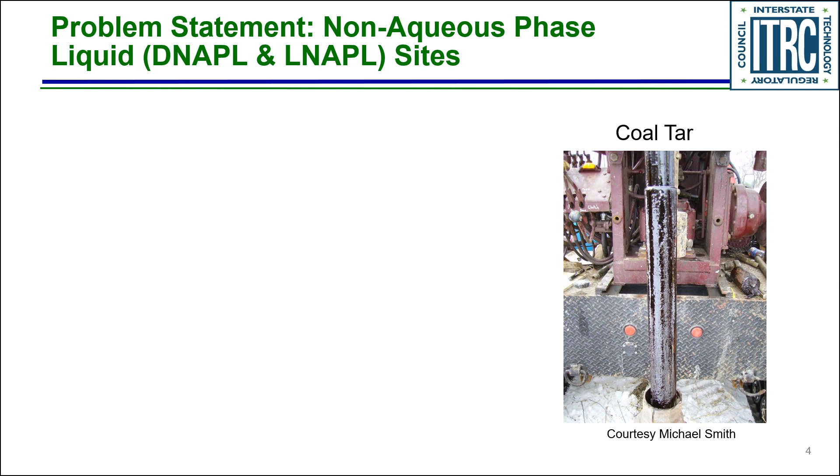So we're going to talk about the problem statement. DNAPL, NAPL in general, is very difficult to clean. It's very challenging to deal with, and most likely provide difficulty, and we don't have enough technology that can deal with that.

But we do have ways to characterize the site, and we're going to talk about that during this training.

One of the problems with the DNAPL site or NAPL site in general is it's very hard to achieve the cleanup goal. We cannot get to MCL easily. We can spend a lot of money, but we cannot eliminate the risk. The risk can stay at the end of the cleanup.

One of the common challenges with the DNAPL site is we don't understand them as well. It's not a complete understanding of the NAPL site because we don't do good characterization - a complex matrix, either man-made or natural. And we set up an unrealistic goal. I can say, oh, I'm going to clean that DNAPL to MCL, and it's very difficult to achieve that. And quite often we select a remedy that does not work for the site.

So what's the objective of our training today? We're going to be talking about how to understand the site conceptual model, typical for DNAPL dissolved phase plume. And we're going to also talk about fate and transport of NAPL in the subsurface.

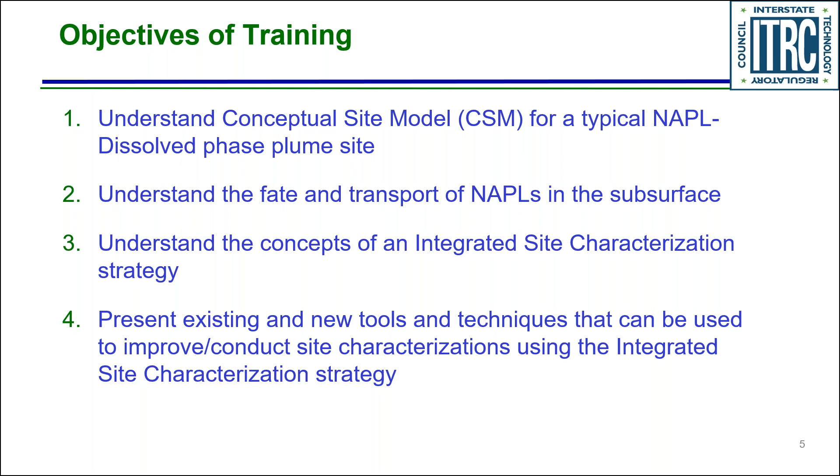So NAPL, L-NAPL, usually a gasoline product in general. Here's some examples of it: benzene, toluene, xylene - all benzene products are considered L-NAPL because they float over water, having a lower specific gravity than water.

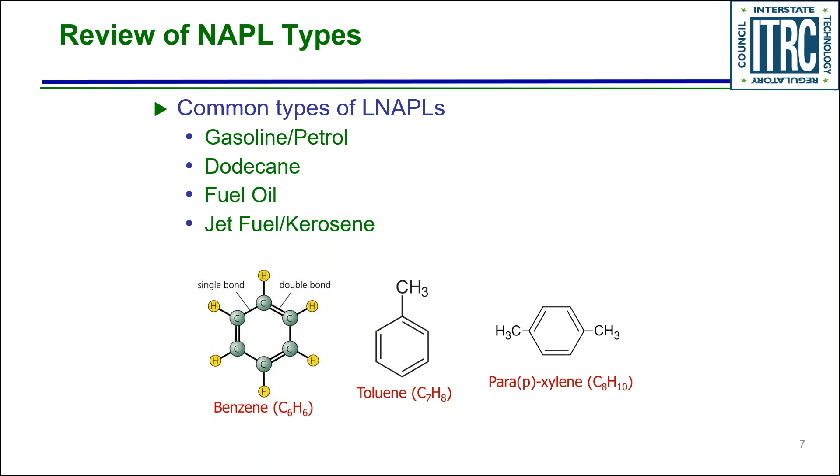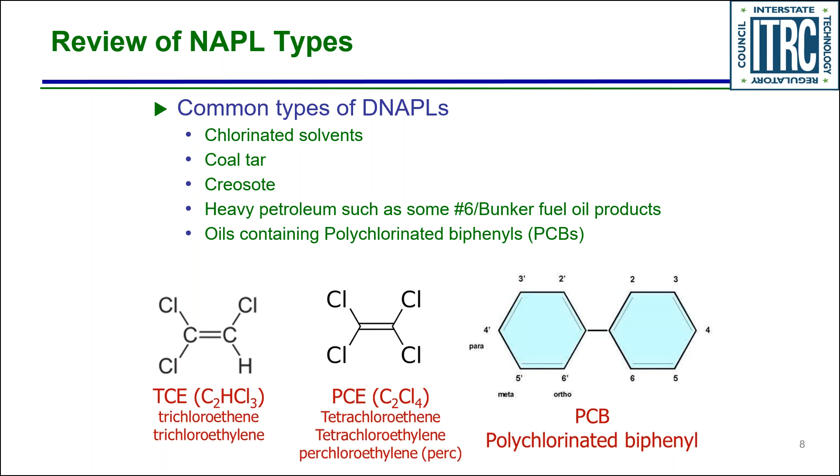And DNAPL - here's an example of DNAPL, TCE, PCE - usually heavier than water and sinks, the sinker. Here's an example, the tube given to us by Dr. Kurt Pennell, and you can see PCE sinks down to the bottom of the tube, and N-hexane floats because it's lighter than water.

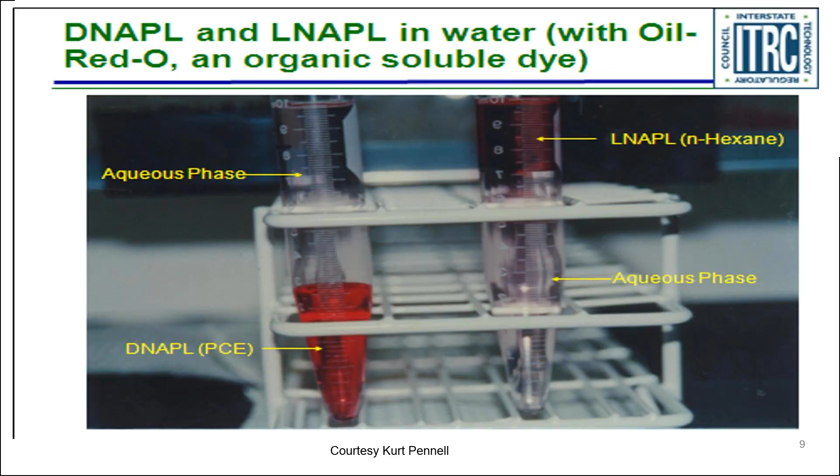We're going to talk about some of the NAPL properties, some of the chemical and physical properties of NAPL. Usually when we discuss those properties we give you equations and examples of how to solve them, but because of the short time frame for this course, we're going to cover maybe one or so, but we're not going to go over all the detail of all these properties.

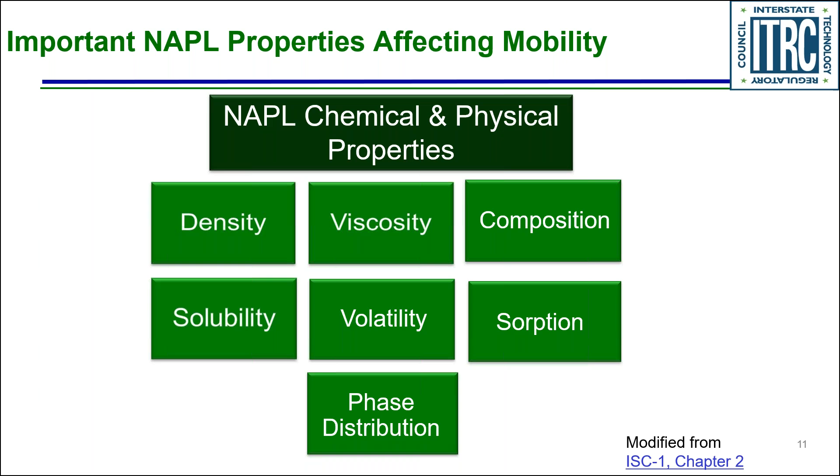So those properties are density, viscosity, composition, solubility, volatility, sorption, and phase distribution. And we're going to talk about those in semi-detail.

So density - density is mass per unit volume, usually expressed in milligrams per liter, or it's mass per volume, or it can be expressed in terms of specific gravity. Specific gravity is the density of a substance or chemical divided by the density of water, and it's a unitless value.

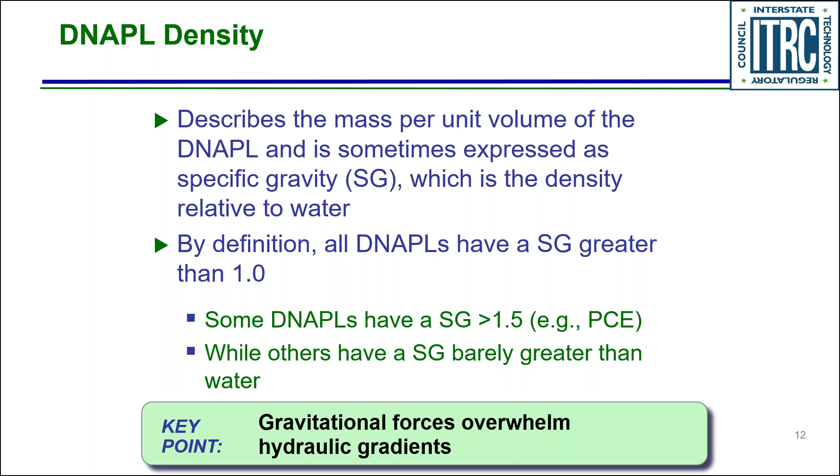DNAPL usually has a specific gravity more than 1, which is heavier than water and usually sinks, as I said earlier, and LNAPL has a specific gravity lower than water and floats on top.

One of the things we need to understand is that the property of the pure NAPL that you purchase from the manufacturer is totally different from the properties of the NAPL you have at your site. The reason for that: the pure product has nothing mixed with it. The NAPL at your site is usually used already - solvent mixed with grease, with oil.

And therefore the property of that NAPL is not the same as the one you purchase from the manufacturer. So you have to make sure you understand that when you go to the textbooks or books and look for solubility of some compound, that can change if you have it at your site. It's not going to be the same.

Also, mixture - NAPL can exist in mixture, and DNAPL can partition into LNAPL. So in some cases, you cannot see the DNAPL or LNAPL in a pure phase at your site. So you need to get a site-specific sample and check site-specific properties in order for you to know the property of the NAPL at your site.

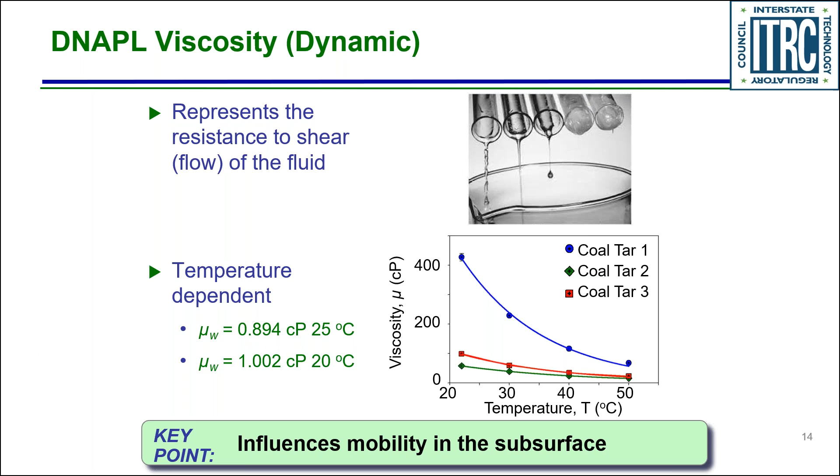This slide here was put here by Chuck Newell, and I'm going to have him describe it and tell us what it's all about. Chuck? Sure, Naji.

So this is just a little anecdote, a very famous experiment in the viscosity world, at the University of Queensland in Australia. In 1927 they set up this experiment. You can see it right there, and there's even a webcam of it. They cut the stem in 1938. This is a very viscous solution, a pitch that comes from trees, and it doesn't flow very much. Now water has a viscosity of about 1 centipoise.

In 1947 the first drop fell, then 1954 was the second one. This is an exciting experiment - there's a lot going on here. You can see it's taking more and more time as you go down. The last drop, the 8th one, fell in 2014.

And Naji, do you think it's okay if we assign some homework to everybody out there attending the webinar? Yeah. So if we heat this, we're thinking it's going to flow faster.

If we heat it, it would, but that's not the homework. The homework is everybody's got to go watch the 9th drop fall - that might be sometime around 2020 or 2030. So we'd like everyone to do that. The viscosity is something like 230 billion centipoise, so it's a very slow drop. That's a viscosity example.

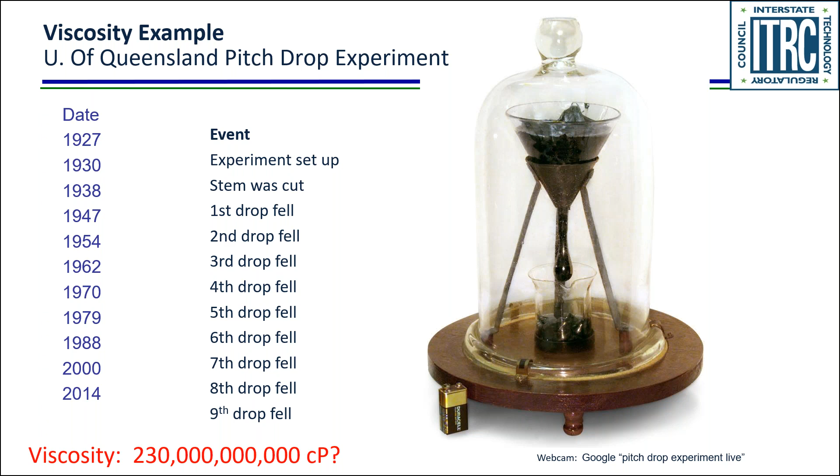Thank you, Chuck. So the next property is solubility. Solubility is basically the maximum amount of pure compound that can be dissolved in water at equilibrium. So we have NAPL here, the red figure, and above the NAPL is water - the maximum amount of NAPL that can dissolve in the water above it is the solubility of that NAPL.

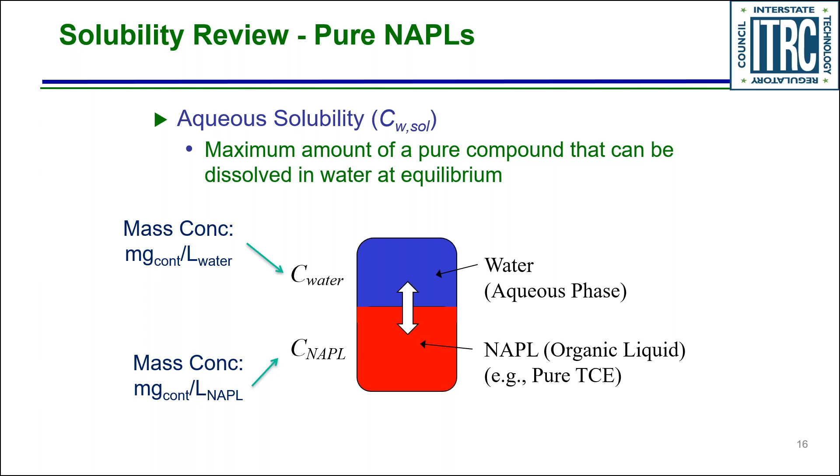Okay, so we're going to have a little exercise here. Usually I have much more math than this, but this is just one example I left in the slide to give you an idea. If we have a 55-gallon drum of TCE, how much water does that 55-gallon drum have the potential to contaminate to the level of the MCL, which is 5 micrograms per liter? So we're going to go through this exercise.

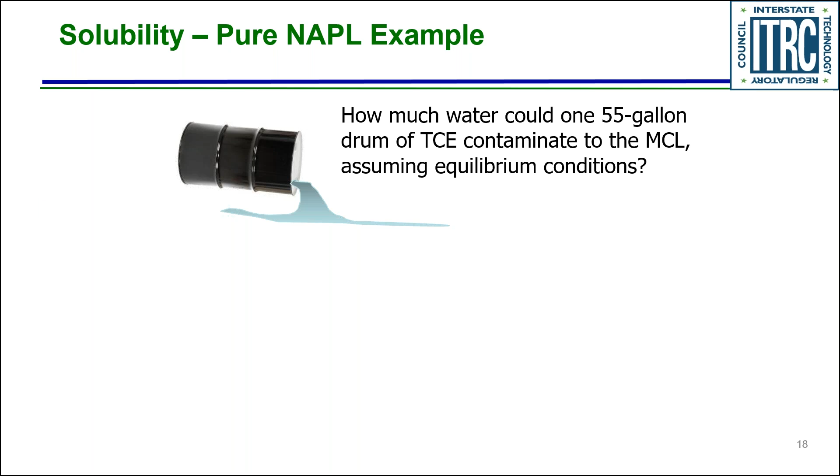55 gallons - we dump them in a big lake with an unlimited amount of water. How many gallons of water will be contaminated above MCL? So here's the equation: 55 gallons, change that to liters and then to milliliters, multiply that by the specific gravity of TCE, which gives us how many grams of TCE. Then convert grams to milligrams, divide that by the MCL of 0.005 milligram, change it back to gallons, and we get 1.61 times 10 to the 10 gallons, which is 16 billion gallons.

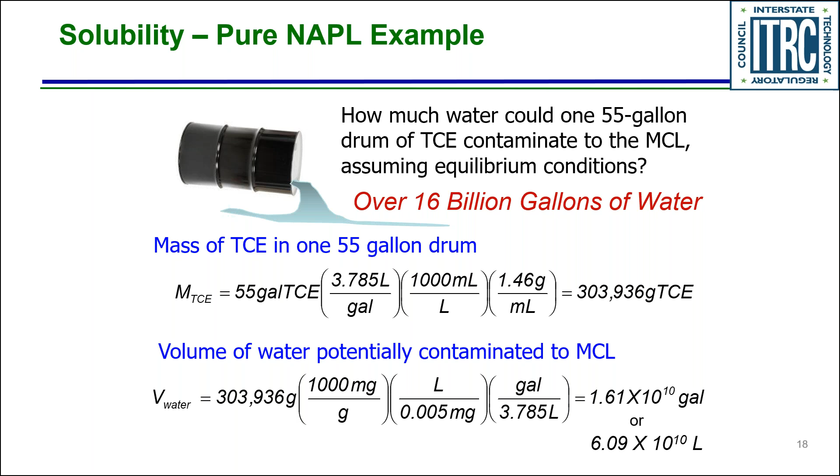The next item here is, or property is, solubility. Solubility for a pure product is different than solubility of a mixture. So we use Raoult's law to figure this one out. If you have a mixture in the subsurface, like TCE, PCE, and some other compound, to calculate the solubility of your mixture for any particular compound, you multiply the mole fraction of that compound by its pure solubility to come up with the solubility of that compound within the mixture.

Is that clear? I assume it is.

The next property is volatility. Volatility is very important in terms of vapor intrusion. The reason we need to know about volatility is because of the danger of vapor intrusion in homes and businesses.

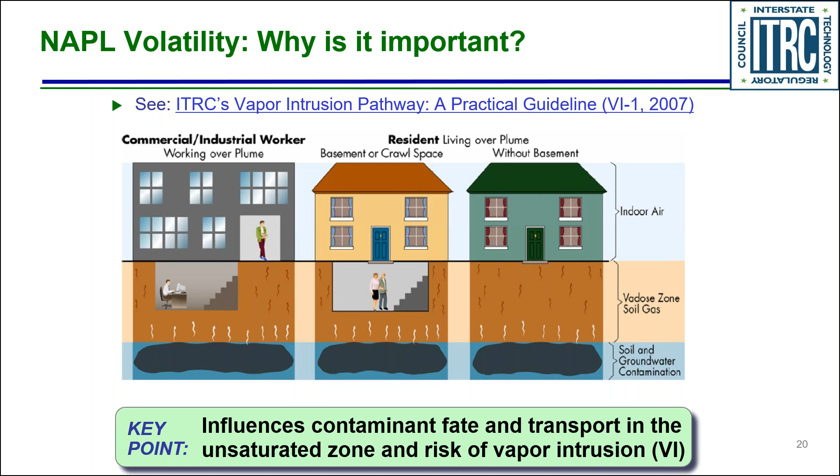So volatility, when it comes to a pure NAPL, as you see here in that figure, you have NAPL and you have vapor above the NAPL. Vapor pressure is the maximum amount of pure compound that can exist in the gas phase. To calculate that, we use the ideal gas law. Here's one form of it, here's another form of the ideal gas law, and a third one that can give you the concentration of gas above the NAPL, shown in red.

Again, I have a mathematical example to try to solve it, but we don't have time for that in this training.

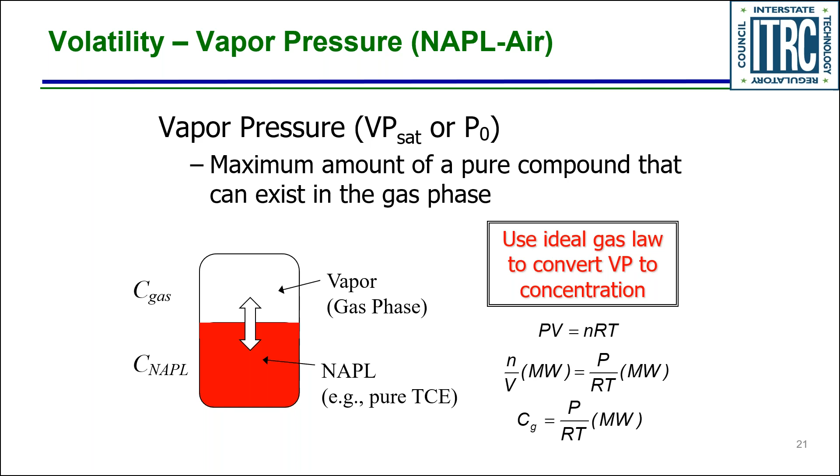Now, sorption. Sorption is dominated by soil organics or high surface area minerals. So if we're talking about absorption, it's basically the soil organic, and if we're talking about adsorption, that will be dominated by high surface area mineral.

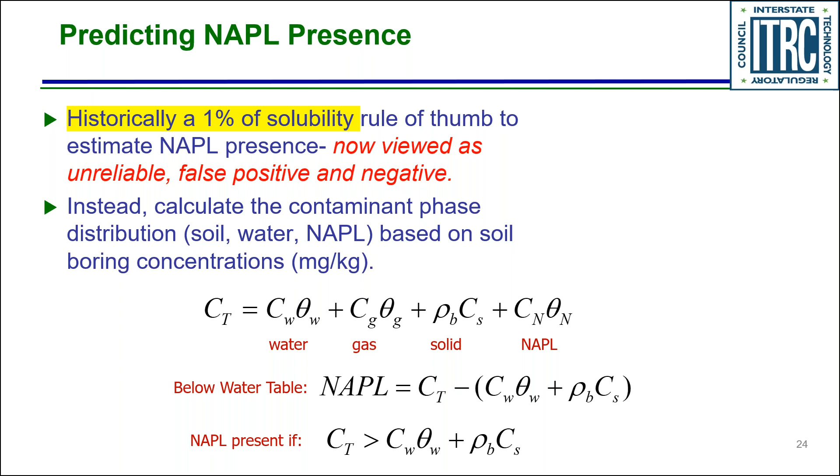Some other properties relate to interaction with the subsurface media that affect mobility, and those are 5 properties: interfacial tension, wettability, capillary pressure, saturation, and residual saturation.

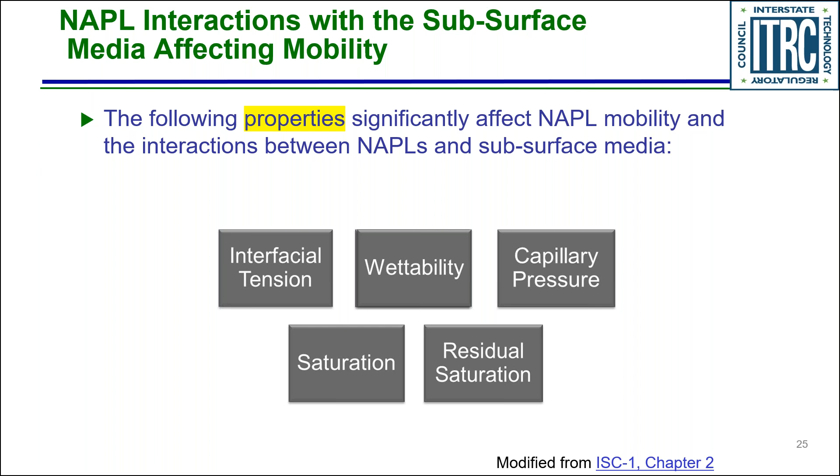I don't think we have time to go over all of those, but I'm going to talk a little bit about saturation and residual saturation because those are the two most applicable to the mobility of the DNAPL in the subsurface. The other ones are important as well, but we only have time for these two.

So what is saturation? Saturation is what proportion of the subsurface pore space within a certain volume you select is occupied by fluid, and that fluid could be DNAPL, air, or water. It's a number between 0 and 1.

The residual saturation is the same volume of soil, but what fraction of that volume has been separated from the original DNAPL and become disconnected from the DNAPL. I'm going to describe that in the next slide.

We're going to talk a little bit about the life cycle of DNAPL. So we're going to start with the classic model. You have a source zone, you have a spill. You can see here where it says active source, that something is spilled there.

The DNAPL is going to go down, migrate down to the subsurface, go through the soil on top of the water, and then continue. If it hits a low permeability zone, it will go around it and keep going down until it gets to the area where it's not going to move anymore.

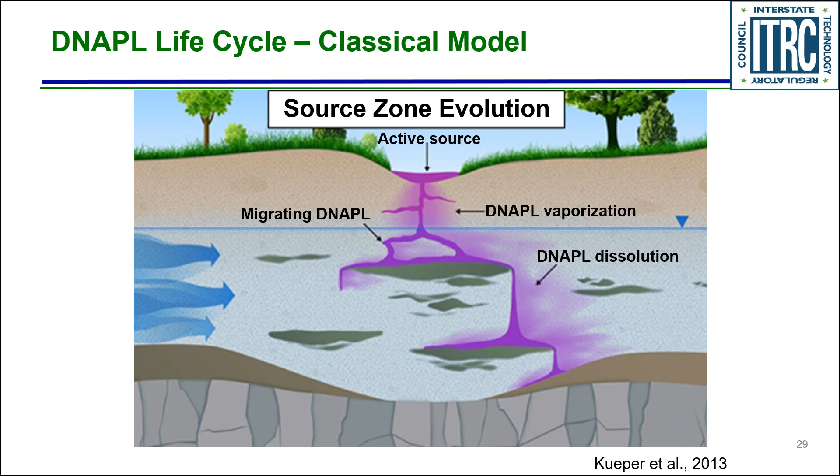So here's another kind of picture of it. We see in this picture some of the DNAPL evaporizing as a vapor, coming out as a vapor. Some is going to dissolve in the plume and move with the plume.

Some will settle down at the bottom of the aquifer, and if there's enough head pressure, the DNAPL will displace water in the pore space and settle there. So basically, you have DNAPL going as vapor, some dissolving, and some settling in the pore space.

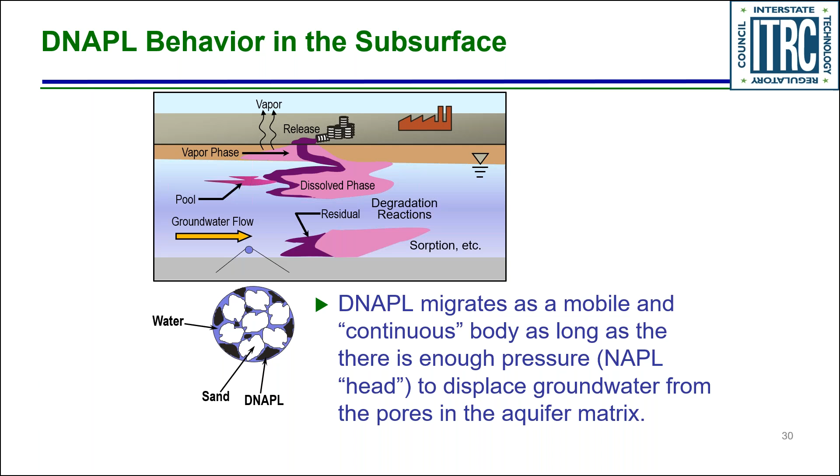One of the issues here is that the subsurface is very heterogeneous. The pore structure in the subsurface and the capillary pressure can change from area to area within a very short space, within inches - you can have a different pore structure and capillary property.

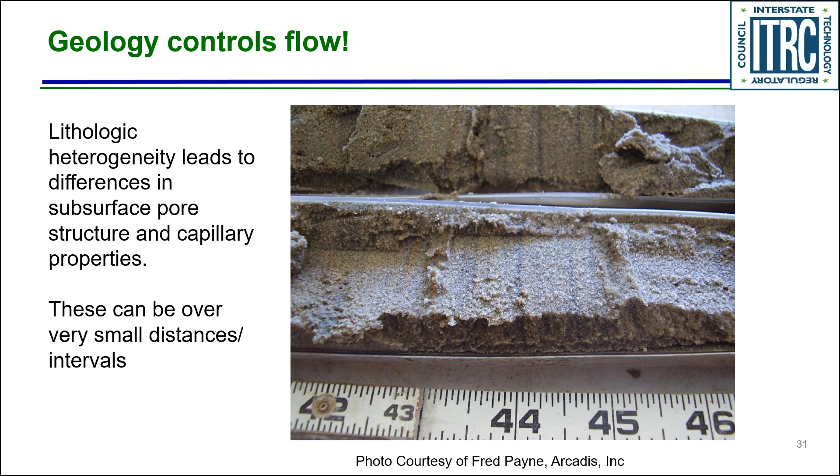Therefore, you need to understand that the subsurface is heterogeneous and the flow is not going to be the same from one zone to another because the pore structure can vary from area to area in a very short distance.

Again, secondary source within the groundwater plume. We always look for DNAPL, we always look for the source, we always look to see where the DNAPL got spilled, where it is - we cannot find it. Quite often we cannot find the DNAPL because, especially in the late phase, the DNAPL has already moved on.

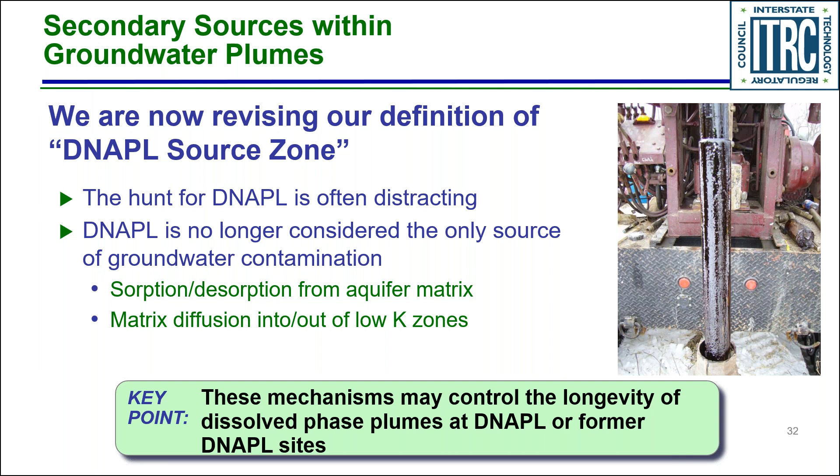What we see is what's sorbed in the aquifer matrix or back diffused from the low permeability zone. So after the DNAPL moved from the source area, you still see high concentration of NAPL in the plume, and you always wonder, where is the DNAPL? It's not there anymore, but the back diffusion process can introduce more contamination to the aquifer.

So here is a video, and I'm going to have Chuck talk about that video quickly. Chuck, take it over. Okay, I think maybe it's on the next slide. Is that right, Naji?

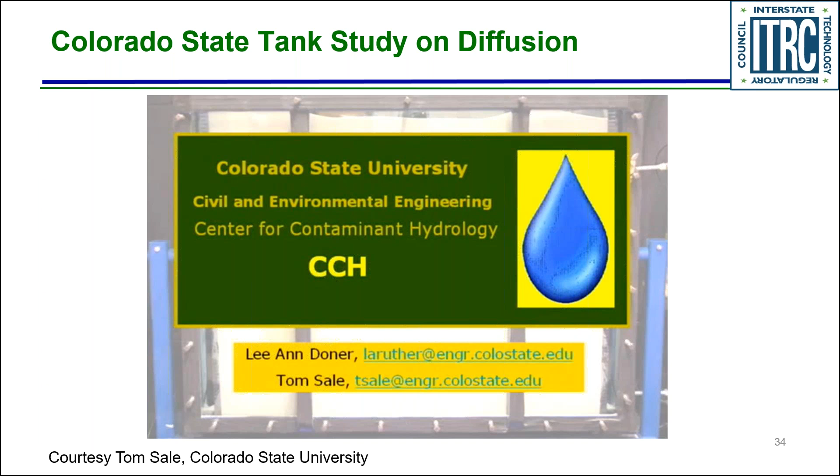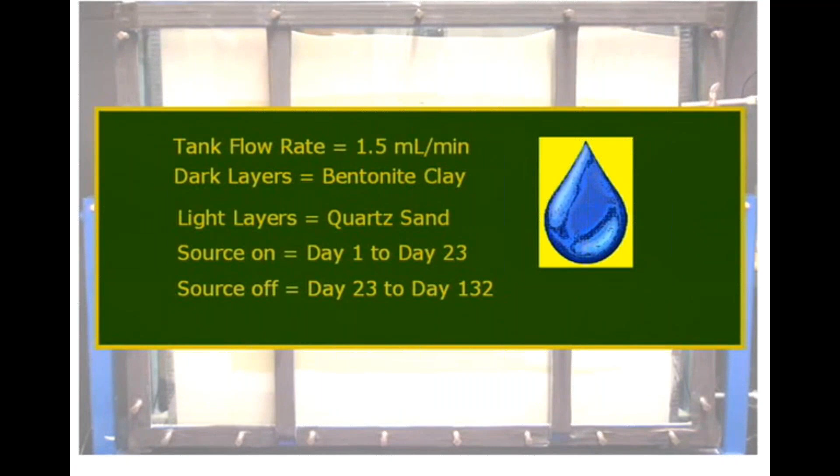Here we go. Okay, so this was developed by Lee Ann, a grad student of Dr. Tom Sale of Colorado State. Here's this research tank. It's filled with sand, but more importantly, 4 of these clay lenses, A, B, C, and D. Lee Ann sets this up, and then they start and set this green dye moving from left to right, and there it is.

So that's advection, that's just groundwater flow, and the counter shows 6 days, 7 days. This is just the way a plume works. It's coming from a source on the left and flowing, and that's your plume. But then you start looking carefully, particularly at that second from the top clay unit. You can see that boundary is getting green.

Then at day 23 they stop that source, and the sand cleans up really, really quickly, just as you'd expect. And that's what a computer model will tell you: 2 or 3 flushes and that sand is clean.

But here we are on day 36, 14 days after they stopped that source, and they're still green in this picture. Where's it coming from? Well, it's coming from this green dye that diffused into these clays, and now that the sand has cleaned up, it's diffusing back out.

And so it's day 55, and Lee Ann comes in and says, Dr. Sale, can I stop? No, keep going. And she's taking these pictures every day. The deal is they run this thing—right now we're at 68 days—for, I think, 132 days, and there's still this material in there.

So just really—Tom Sale says this is perhaps the best demonstration of matrix diffusion, better than any of the great papers he wrote, but this is how we explain it. So that's what I've got, Naji. Let's move on. Thank you.

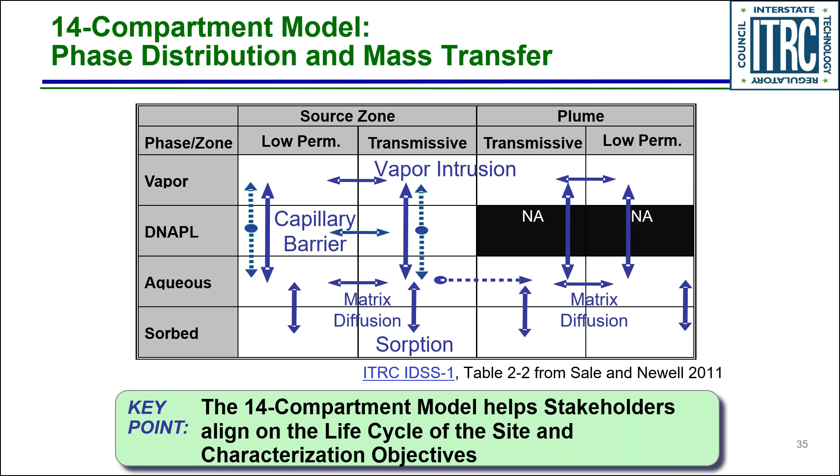So I'll give you an idea: if you're losing mass, you could have lost mass to vapor, lost mass to aqueous, or lost mass because it was sorbed in the soil.

Okay, so continuing with the life cycle: early stage, we have that traditional or classical spill. The DNAPL goes down, and the 14 compartment model is shown again below. You can see at the early stage, as the NAPL goes down into the low permeability zone, there is very low mass in it, but there's a lot of mass, or a moderate amount, in the transmissive zone and in the plume.

The low K zone still does not have as much mass in it yet, because it has not gotten there yet.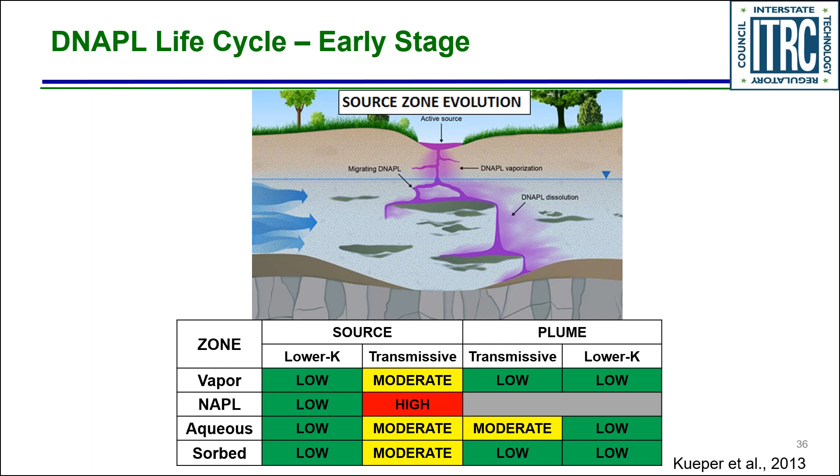But the aqueous phase has a moderate amount of mass. If you go to the middle stage, where the DNAPL now has had enough time to occupy all the stages, it's DNAPL everywhere, okay? So in the middle stage, you see a moderate amount of DNAPL in all phases.

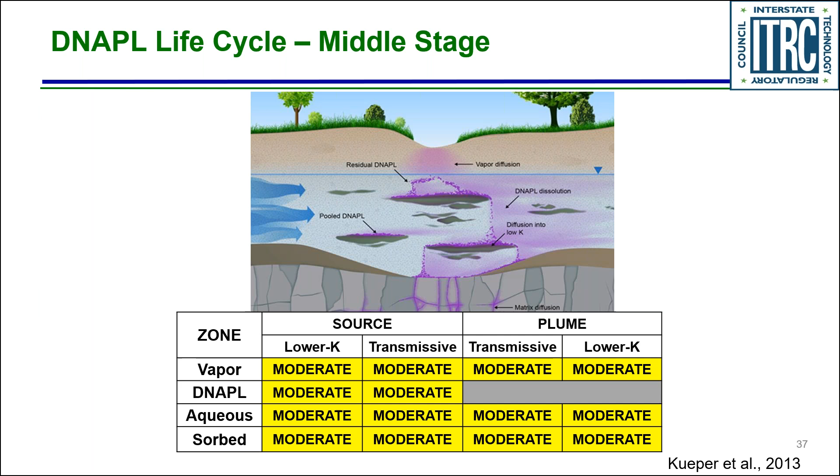In the late stage, you can see the NAPL has already moved from the source and from the plume, but it lingered behind in the aqueous and sorbed phase in the source as well as the plume. You still have a moderate amount because the sorbed phase will continue to feed the plume, so you will have continuous NAPL or contamination going to the plume in the late stage in the aqueous phase and sorbed phase.

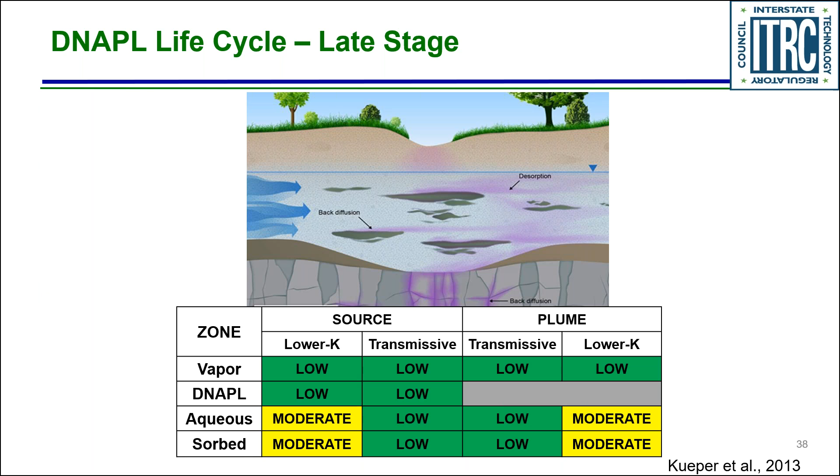So from here, I'm going to turn it over to Dr. Chuck Newell, and I'm going to take the slides from here.

Thanks, Naji. And just checking in, can everybody, I've been made the presenter. I'm going to show my screen. Now how does that look to everybody? Can we, Naji, can you see my slide, my screen? Well, I'm still seeing my screen. I don't know if Dora can tell me what to do to see your screen, but I can follow your slide because we have the same set anyway. I can see your screen, Chuck. It looks good, and I can hear you clearly, so you're good to go.

Great, let's go. Okay, now we're going to talk about what I call the journey is the reward. This process, this integrated site characterization process, on how you take all the technical knowledge that Naji talked about, and we're going to talk about a plan. How do you select tools for characterizing that DNAPL site, and then the implementation of it.

So what we're going to do is talk about this new paradigm on how sites work, new concepts regarding matrix diffusion and things like that. That heterogeneity is really important, the geologic heterogeneity. I call it the revenge of the geologist, that we've got to start thinking about where these contaminants can diffuse into low permeability units, that anisotropic conditions replace isotropic conditions. It's not a uniform geology down there.

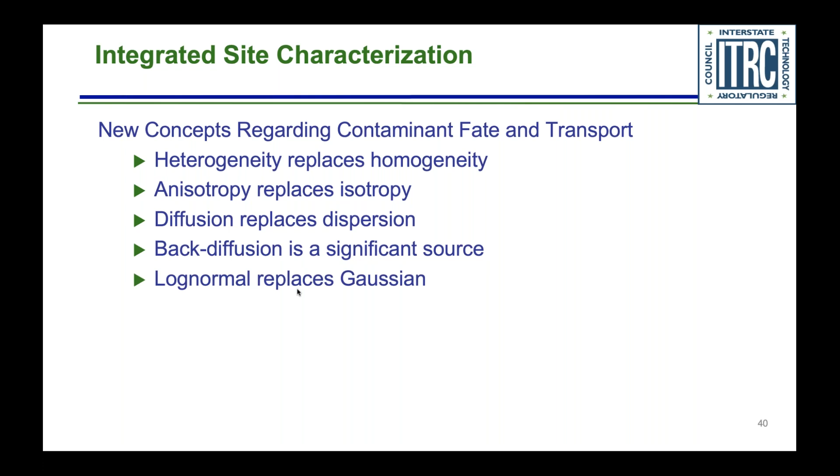This is a key one: that diffusion is really important, and it's supplanting the dispersion that we used for a long time, thinking that was one of the key transport processes. Back diffusion can be a significant source, just as DNAPL can, and it becomes more of a log normal world than a bell-shaped world, a Gaussian distribution, and things are in dynamics. Stuff's diffusing into clays, it's diffusing out, and that replaces this steady state condition.

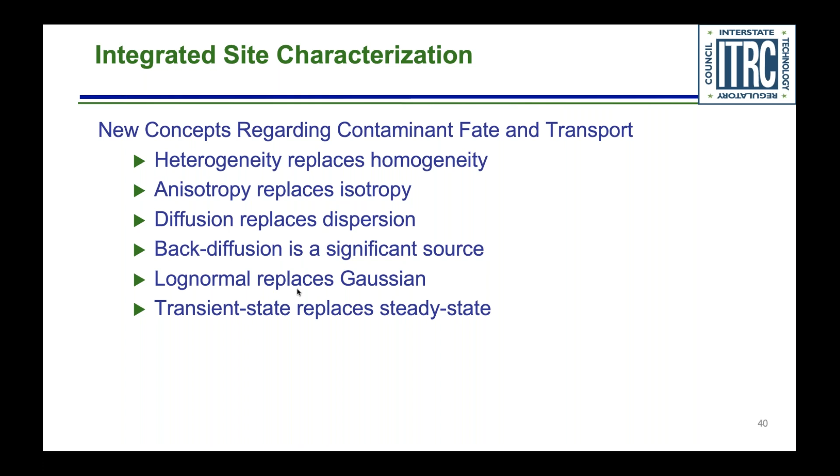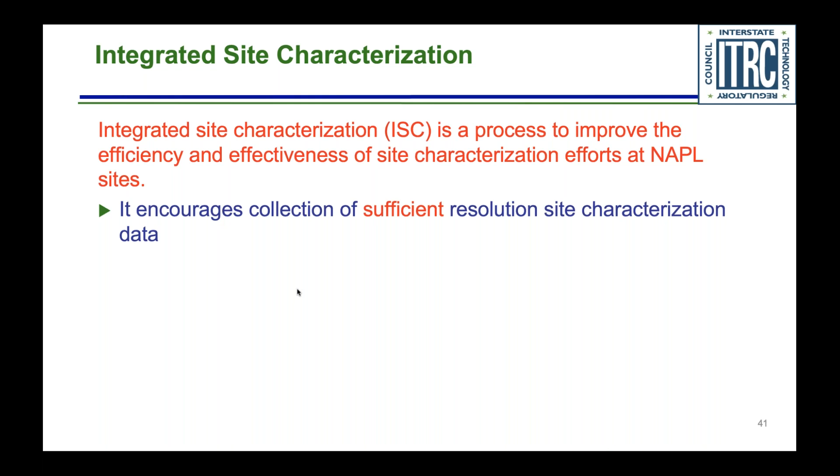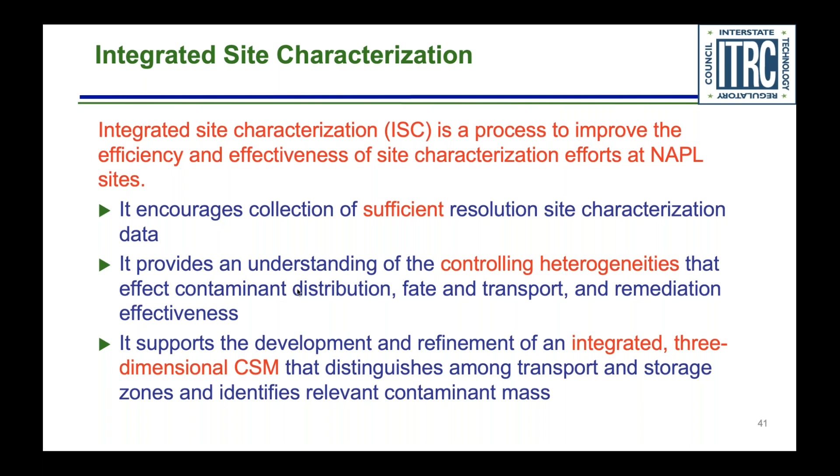Okay, so then we're going to talk about this integrated site characterization, and it's a process to improve the efficiency and effectiveness of site characterization efforts at NAPL sites. We want to get sufficient resolution of data. We want to understand what controls these controlling heterogeneities and how they affect distribution, fate, and transport. And we want to get this integrated three-dimensional conceptual site model that incorporates all this stuff so we can understand much better how fate and transport works at a site.

Okay, so the key goal here is we want to develop a conceptual site model with significant depth and clarity so that risk can be accurately assessed and appropriate remediation strategies be developed. So we're trying to get this conceptual site model. Where did the stuff get in the ground? What happened to it? What are the processes that are affecting it?

Okay, now the key thing the team really worked on is this concept that you have to come up with objectives-based site characterization. And this emphasizes that you have to have clear, effective objectives that drive the data collection here. Now it's systematic, it's a stepwise process that encourages things like systematic planning, dynamic work strategies, getting the information out there, and then real-time measurements so you get these fast feedback loops.

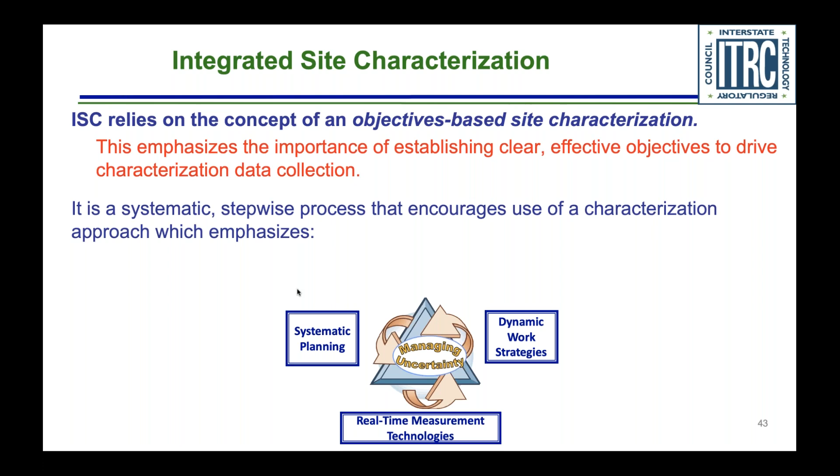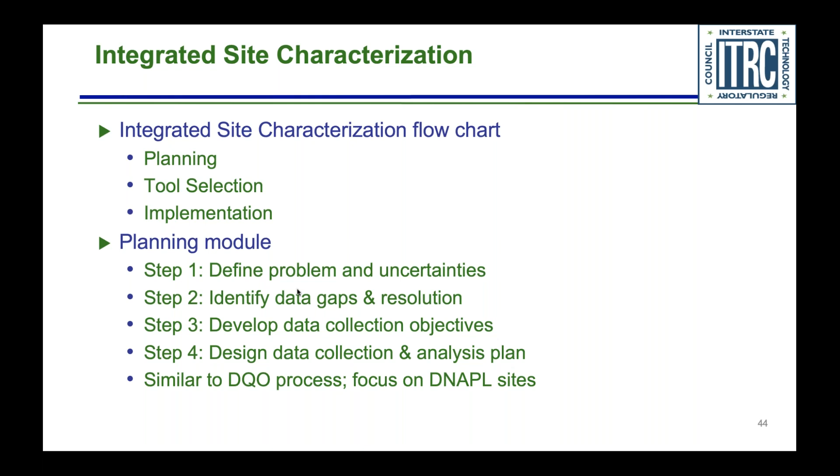And you can sort of see this, the document really focuses on this process. You're going to make these objectives, go out and get that data, and then figure out what your conceptual site model really looks like. So now here's just the different pieces: there's planning, tool selection, implementation, and the planning module's got these four steps, and so we're going to talk about that. But this is an ITRC document, right? So it's got to have one of those flow charts.

So yep, here it is. So here's this flow chart, and we're going to keep coming back on this.

This is the process you're going to use with all this new fate and transport knowledge. We're going to think about matrix diffusion, define the problem, identify the data needs and the resolution, develop these data collection objectives. So, I want to know X. So how do I do that? Then you're going to design a data collection analysis plan to meet those objectives, to get that key information in there. So that's the planning part, the first 4 steps of the flow chart.

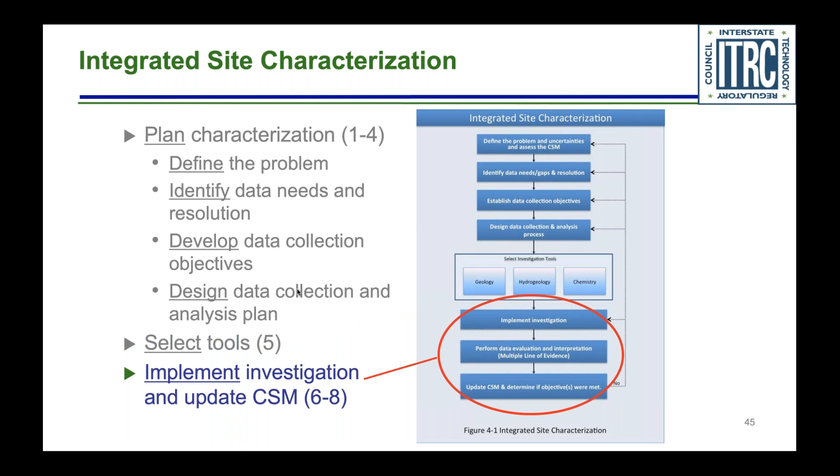Then we're going to select tools. There's this detailed spreadsheet of tools that we'll show you. And then you're going to implement this, actually put it out in the field, and update this conceptual site model. Okay, so let's do step 1: define the problem, assess CSM uncertainties.

So we're going to figure all this stuff out. And for this, I think we go to this dry cleaner site. So this is the example that the group came up with. It's a commercial residential location, pretty shallow groundwater, 20 feet, 6 meters.

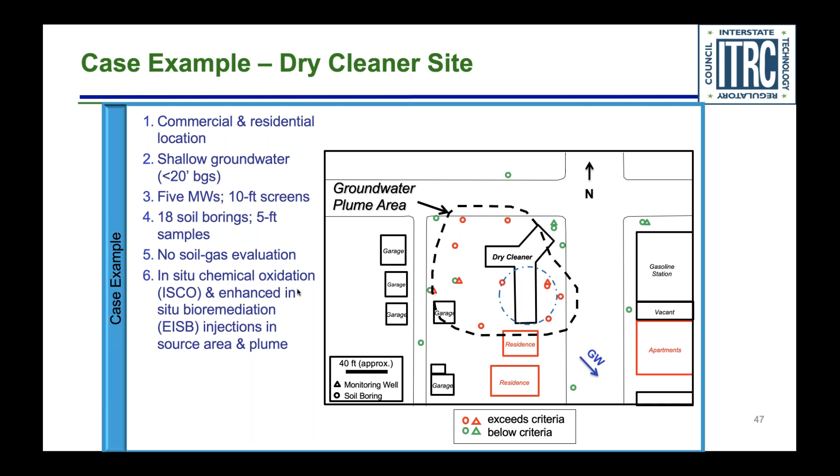Right now, 5 monitoring wells are out there. There's 18 soil borings. There's no soil gas. Maybe there's been some treatment that's in there, but there's quite a bit of uncertainty about what the real picture here is.

And so we've got to figure some of that stuff out. For example, we don't know what the down gradient situation looks like. If you look on the bottom right, groundwater is flowing sort of to the bottom right. There's no wells out there that are non-detect. The source area is inferred, we're not sure it's really there. There's no soil gas in there, there's been no evaluation of this. So we've got to do better than that.

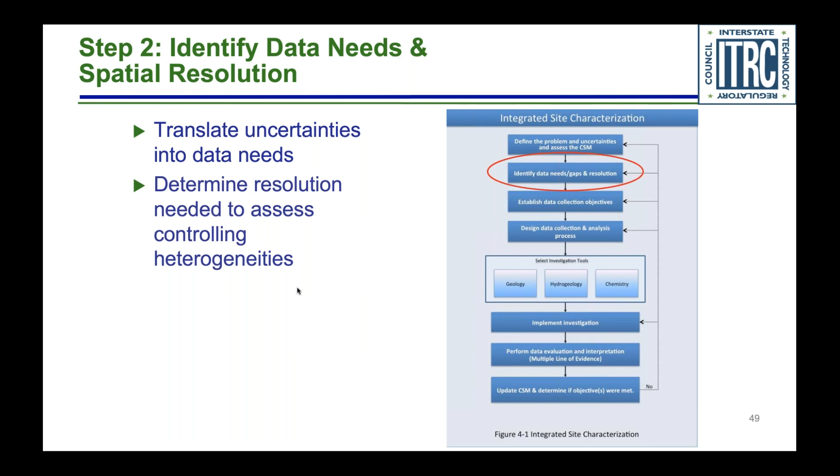So step 2, identify the data needs and the spatial resolution. We're going to translate those questions we have about the site into these data needs, and then determine the resolution needed to assess these controlling heterogeneities, that key geology stuff.

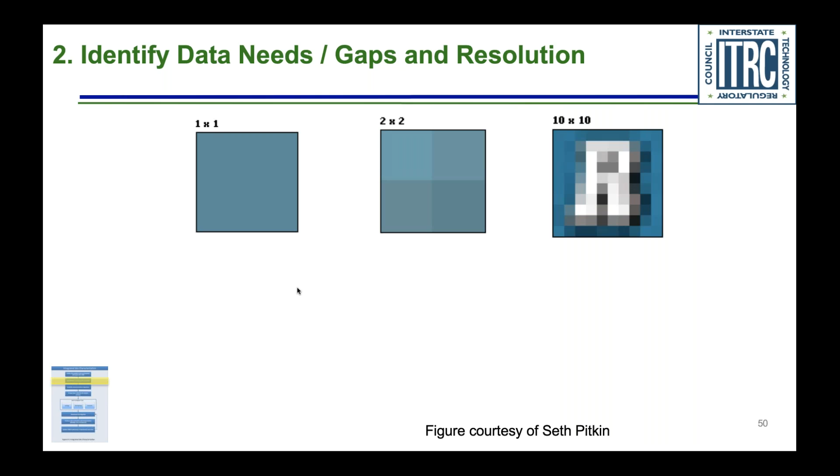So here's something about the resolution. This is from Seth Pitkin. I really like this a lot, that you can have different pixelations in here. This is like maybe a spy satellite getting better over time, and eventually they can read license plates from space. But it's the same for us: if you only have a few monitoring wells with 10-foot screens, that's not very high resolution. But the more data points you get in there, this picture can crystallize in front of your face and you can really see it.

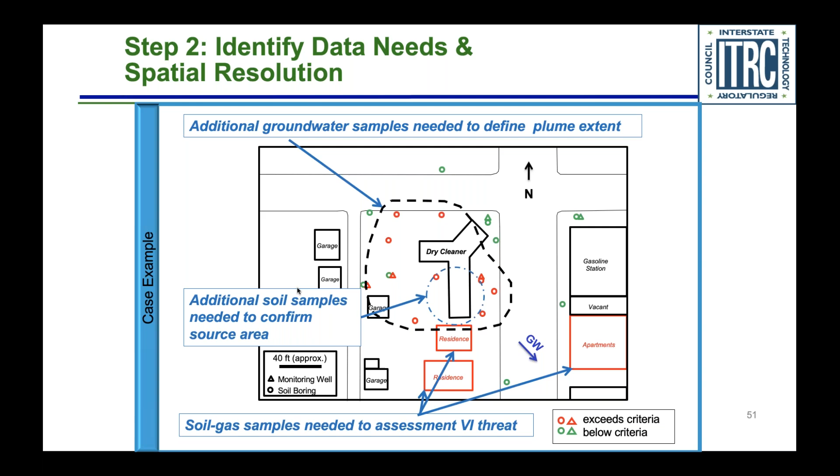Okay, so step 2, let's start thinking about some of this stuff. Additional groundwater samples are needed to define that plume extent and see if that boundary really works. Additional soil samples to really say where is that source mass that we're going to go in there. We've got these residences and the apartments, we've got to do some soil gas stuff here as well. So that's step 2, let's go in here.

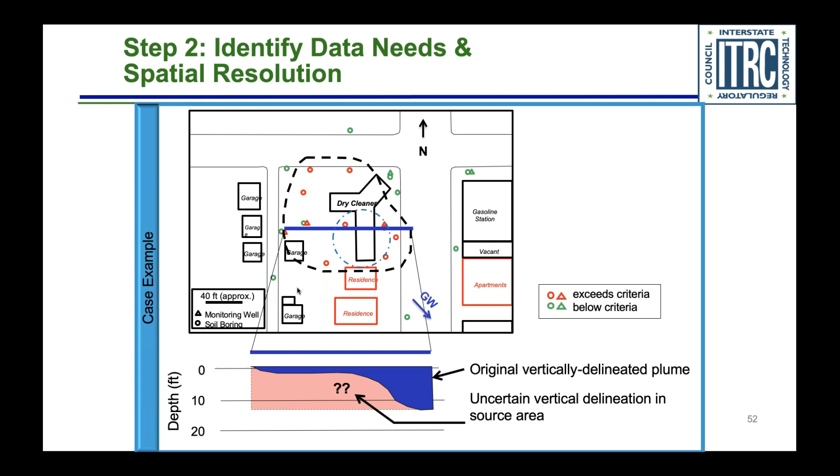And then there's also this vertical part. If you look in here, the blue is sort of where some of the soil borings were done, and if you do this cross section from left and right, the pink, we're not really sure what's down there. We need to go in there and look underneath there and see what's going on. Okay, so that's identifying our data needs and what resolution we need.

And then here's this thing, then we've got to write down, we've got to formalize - this is a contract to ourselves - what are these data collection objectives? They've got to be specific, clear, actionable. It's not just 'I want to understand exactly everything about the site.' I want to know exactly where that 5 microgram per liter contour is down gradient, for example. I want to know if that source zone is deeper than what we think it is.

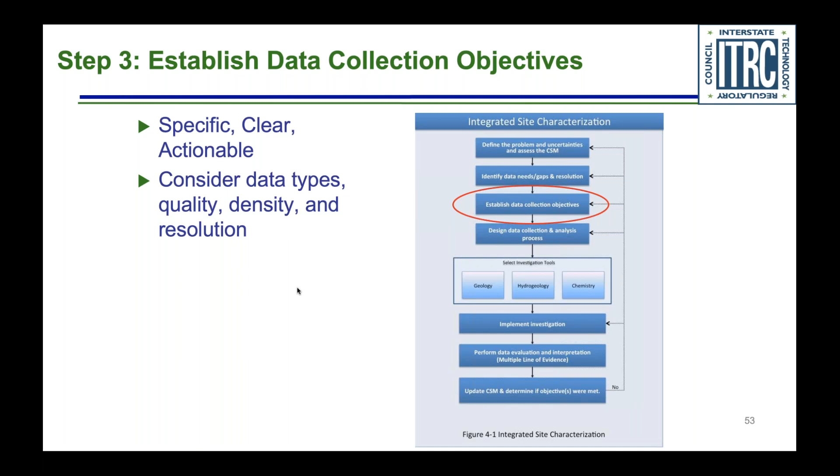We're going to consider data types, quality and density, and the resolution of all this stuff in this process. So we're marching down that flow chart, still in the top part, but in our mind we're starting to get this plan together. Okay, so here's some examples of data collection objectives. We want to do groundwater grab samples at X and Y depths out there. This is for delineation of the extent of that plume.

We want to do soil borings every certain number of feet to capture that subsurface variability, and delineate to groundwater standards, the 5 microgram per liter MCL.

Okay, let's start with installing 3 to 5 wells. We're going to monitor along the axis of flow, quarterly for 2 years, evaluating concentration versus time and concentration versus distance. We're going to get COCs and geochemical parameters. Maybe this is some natural attenuation stuff we're going to be thinking about.

Okay, so that's step 3. Then we do this data collection analysis plan. We're going to write the work plan, recognize limitations of our data, select some sort of data management tools, and develop this data management process.

And here the group says, really think about some real-time analysis, because if you're out there and you've got this on-site lab, you can get these feedback loops really quick, and you can get more done for less money.

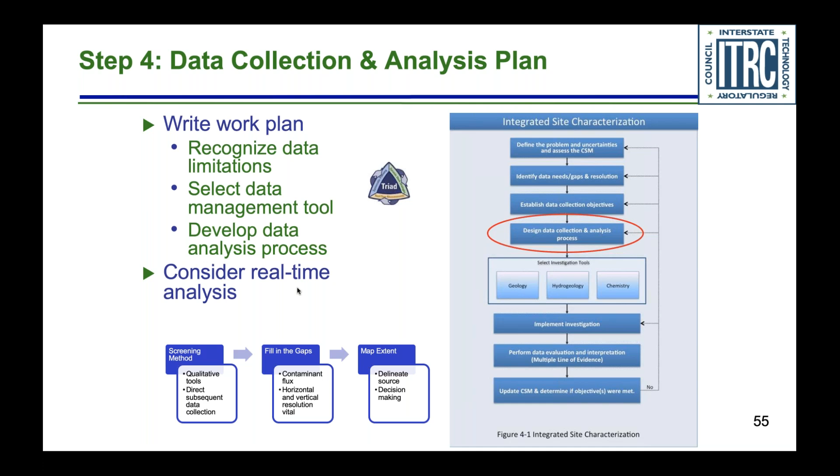And then there's a screening method. You fill in the gaps, you map the extent. So that's this consideration there in step 4.

So generally 3 types of data are collected. There's quantitative tools that provide actual numbers—it's this many micrograms per liter, this many micrograms per meter cubed for vapor, okay?

Then there's semi-quantitative, and it's stuff that's not really in key concentration units, but it may be something like a MIP, that sort of gives you some other reading that's coming out of there.

And then finally, there's qualitative, which is an indirect measure. They talk about this PID or something like that, which provides a relative measure of absence or presence, but alone you can't use that to compare against standards. But all 3 things have their part in here, and they can help you figure out that conceptual site model.

We're interested in accuracy and precision—how close a result comes to a true value. That's the accuracy, where you can get close to that bullseye. And precision is just, if you keep doing this over and over again, what is that consistency?

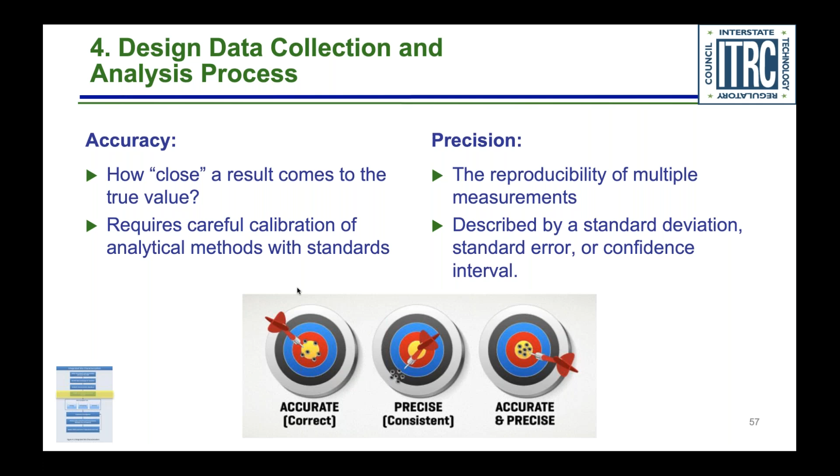Naji's got a background as a quality control engineer, so this is sort of close to his heart, but this is talked about in the design document, so you understand how accurate your readings are and how precise they are, to sort of understand where you are standing in this statistical world.

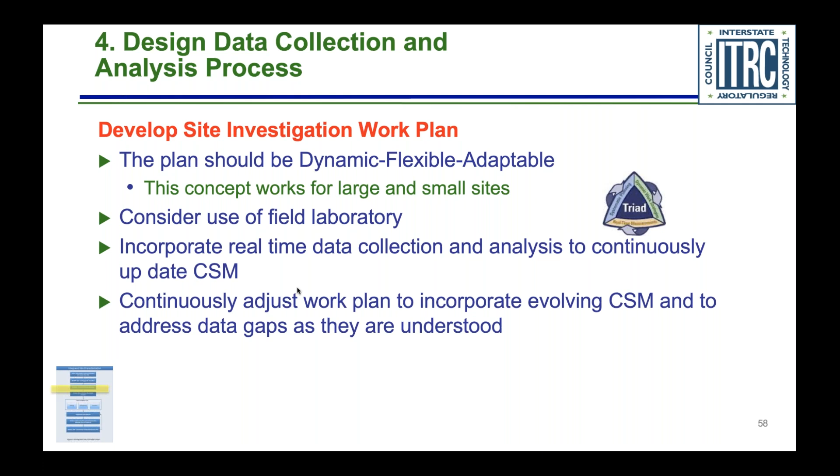So number 4 is we're going to design this data collection analysis process, get this work plan. It should be dynamic, flexible, and adaptable. It's going to work for large sites. Some of the stuff we've talked about—field laboratories are good, real-time data collection—and you adjust this thing to address these data gaps.

So going back in here, here's this updated plume area. We've done these borings, we've done these groundwater grab samples, 3 per boring. We're actually taking some of this data from sort of a direct push in there. And now we're getting a clear picture of what's going on here—we've got this updated groundwater plume area. So this is our design of what we're going to do and get this stuff out there.

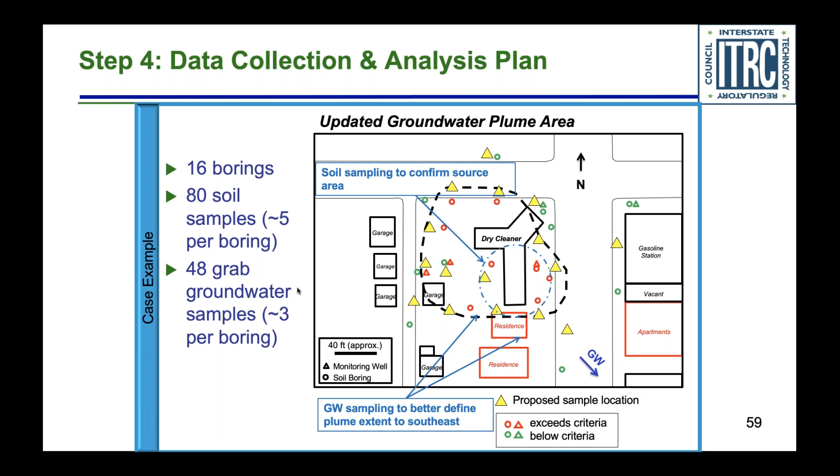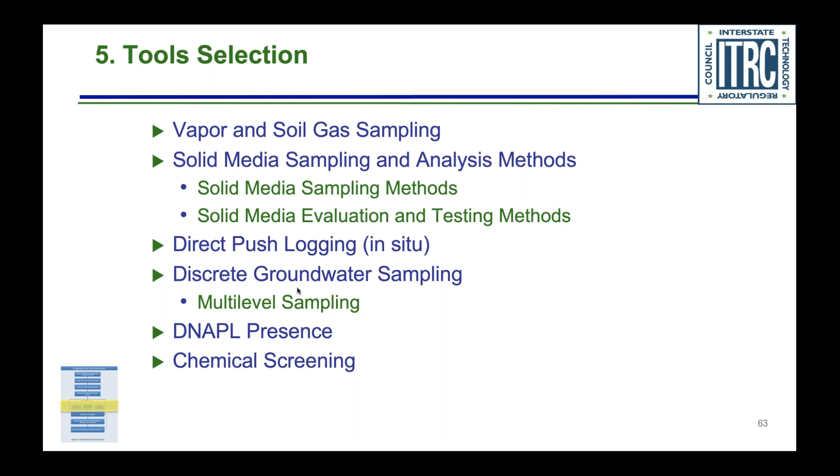Okay, so now we've done the plan, and now we're going to select the tools. So we're going to give you a little bit about the tools matrix, the framework, this functionality, case studies, and then we're going to talk about all these things: vapor and soil gas, solid media, geologic media, direct push tools, discrete groundwater sampling, DNAPL presence, and chemical screening.

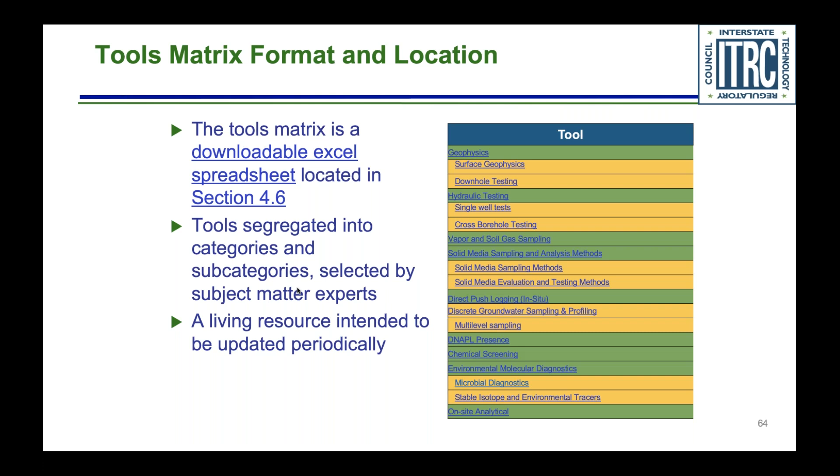And so this thing is out there so you can look and say, I want to look at tools to answer my question—what are my options here? It contains over 100 tools, and you can look at this. They're sorted in different ways, by geology—is it fractured rock or unconsolidated? And it's ranked by data quality: is this quantitative, semi-quantitative, or qualitative?

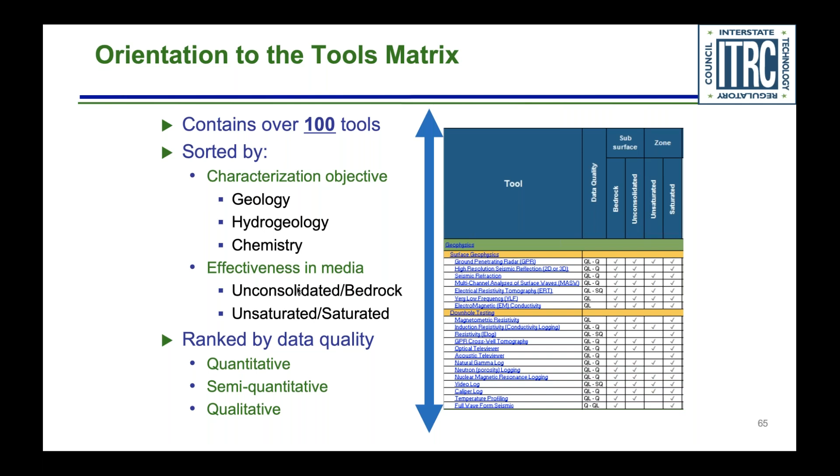And now you can start culling these out and seeing which ones are going to help answer my problem. Here's just some more looking at this spreadsheet - the surface geophysics, the subsurface, the zone, the geology that it works on, and some of the different information, the green boxes. You click on any box for a description or definition, and you get all this text that the group worked so hard to develop.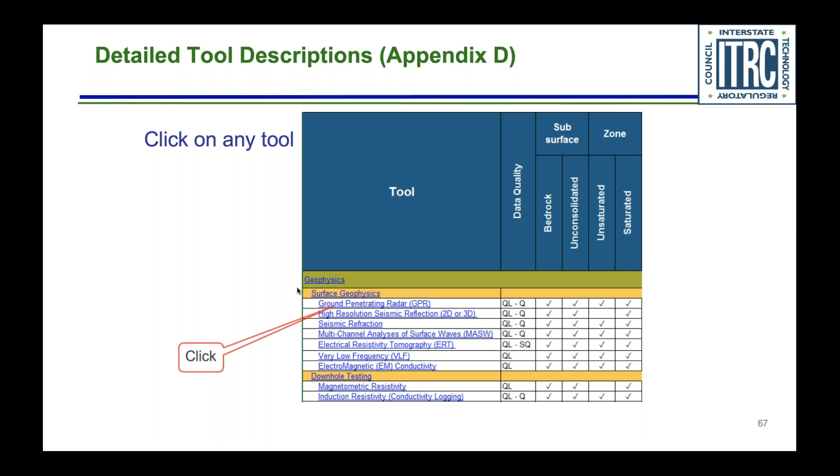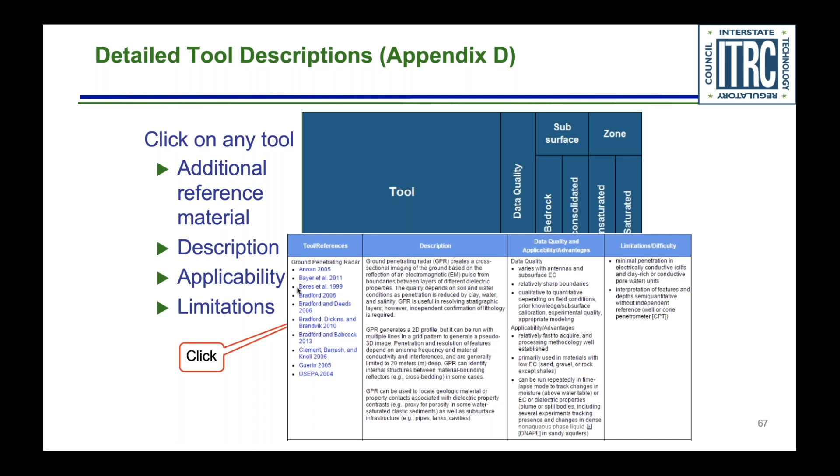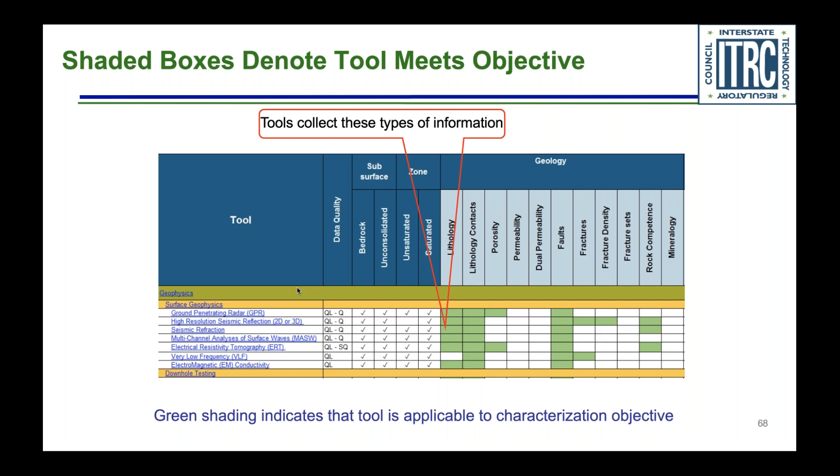So here's Appendix D, ground penetrating radar - this is the type of information you come up with. This is trying to expand your world so you can really get this description, applicability, and limitations of all these different characterization methods. Just another view here, the shaded boxes - green means it meets these objectives, and that this is a tool you should potentially consider to do this stuff.

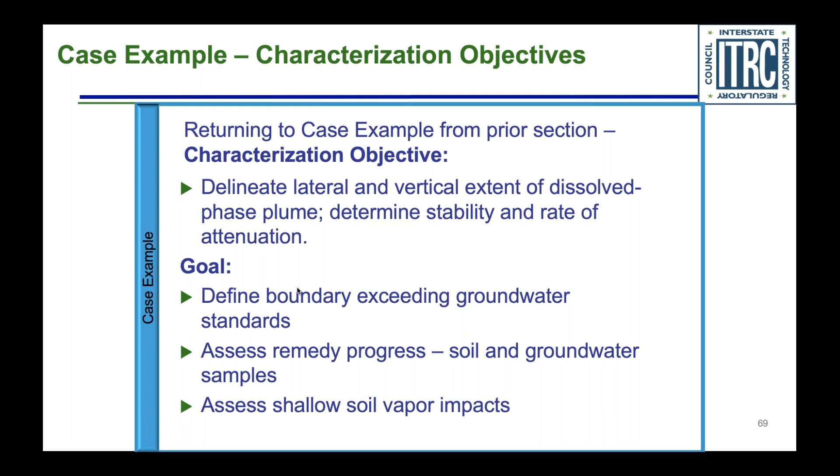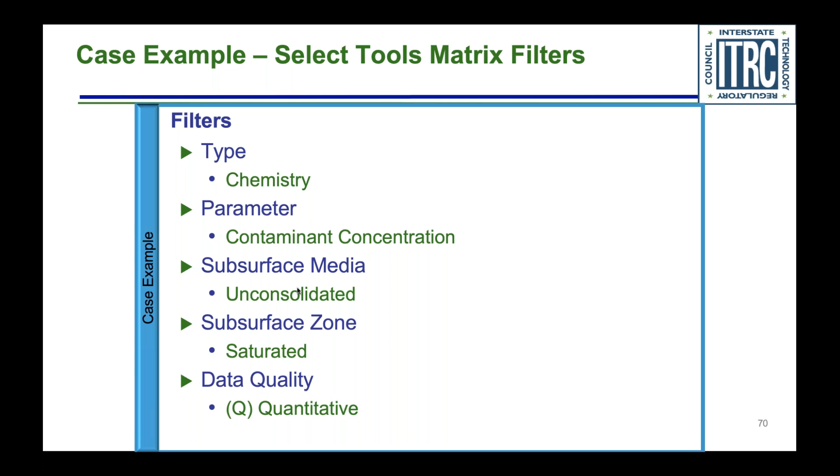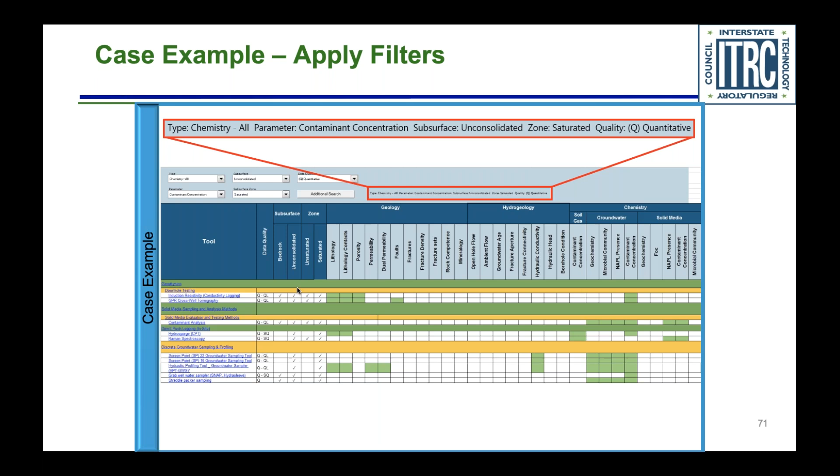We're going to filter by chemistry, concentration - it's unconsolidated, it's saturated. And then we put that stuff in there and we start seeing these things on the left, these different examples we might consider to help answer some of our questions after we apply these filters. So here's the tools, and this is the information you get, and you can see on the green boxes which tool is giving you what type of information.

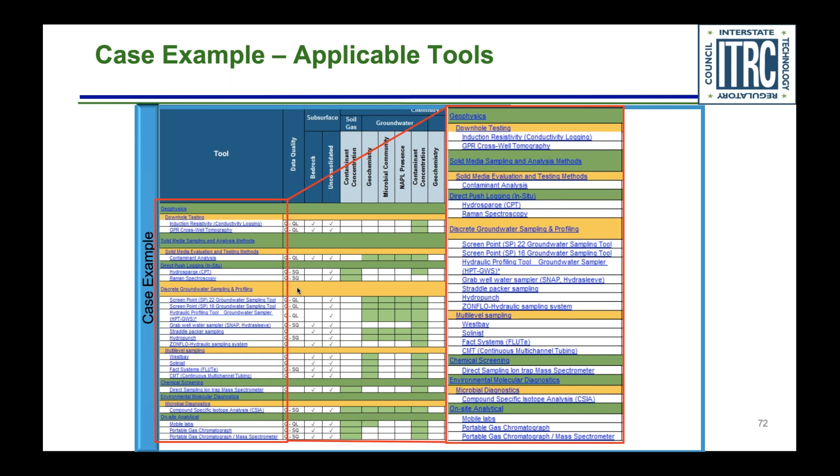So just sort of feeding up, this is all the ones you might consider in terms of different devices that meet the goals or might be able to help you answer your data collection objectives. The search in this case returned 21 tools, and then we want to expedite the assessment. So based on that, let's do direct push borings, the active soil gas survey, and we got this mobile lab out there to get fast turnaround, fast feedback.

So the matrix summary is an objective selection of tools - there's over 100 in there. It helps you do this selection process, evaluate the results, align the data gaps, and you repeat until those objectives have been met.

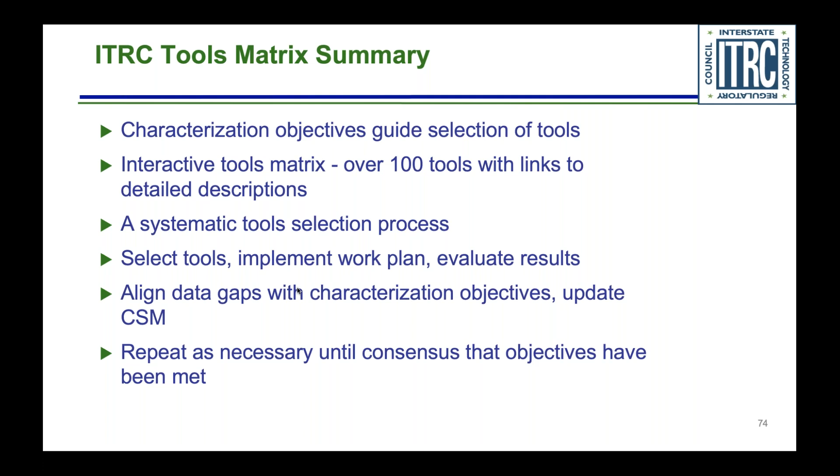Okay, a couple slides about implementation - this is at the very bottom. We're going to implement the investigation, perform this data evaluation and interpretation. And finally, here's the real gold behind all this: update that conceptual site model.

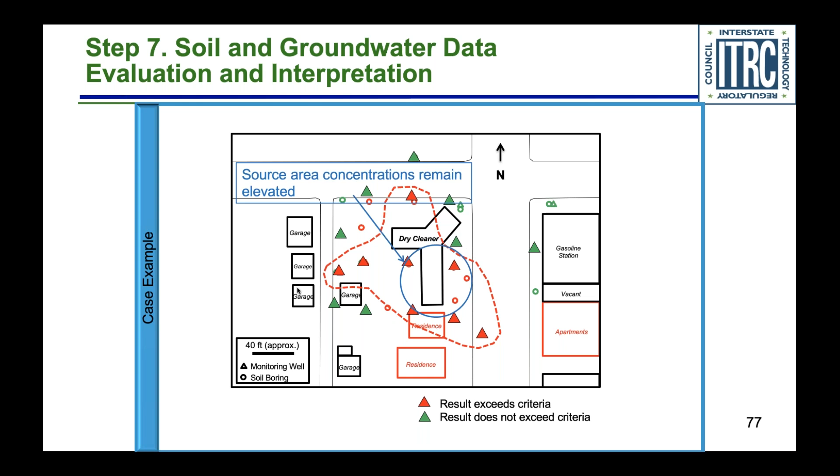Source area concentrations remain elevated, so more work has got to be done. So we got to update this conceptual site model, putting in the data from all phases of the project. As it progresses, the data needs are going to shift, and the questions get narrower as you go through more iterations to update that conceptual site model - it will evolve over time.

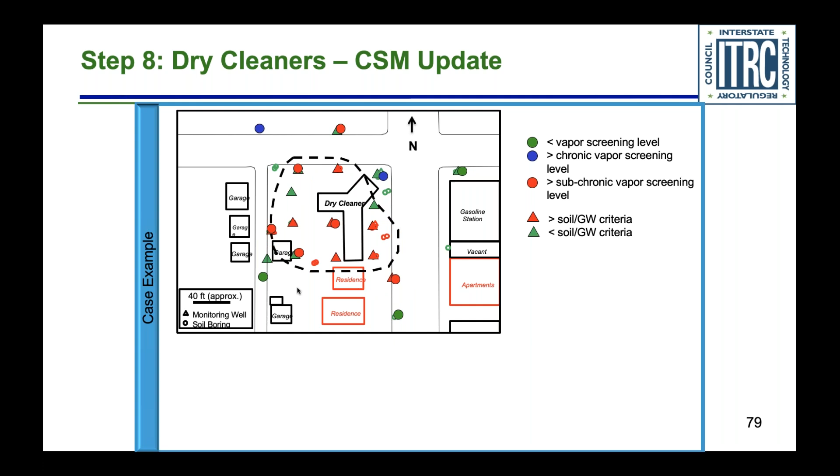So here's this new picture that we're looking at - the screening levels for vapor, the soil criteria, the groundwater criteria. We've got this picture of the vapor right here, here's some of the groundwater stuff, and then looking down below, we've got a better vertical picture of what's going on. So this is our update of the conceptual site model.

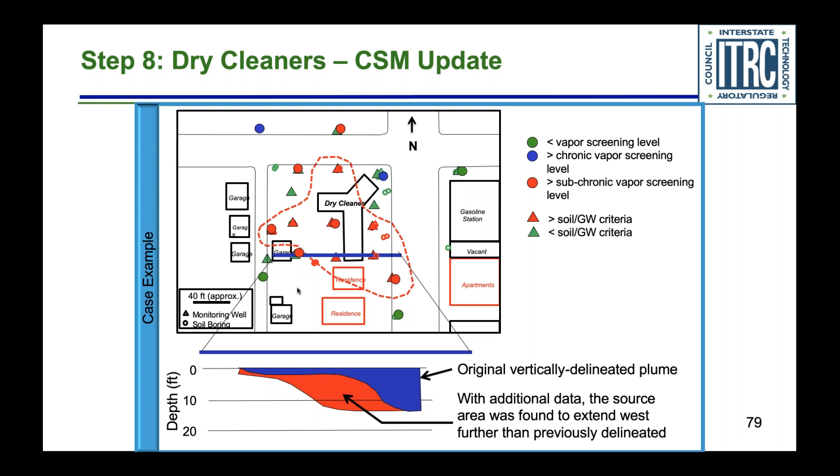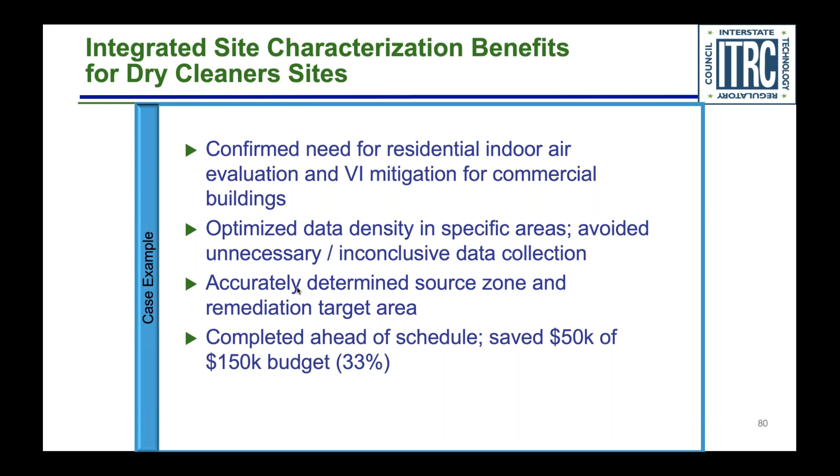So the benefits from this, it confirmed, hey, you need to do this indoor air stuff. There are some issues out there. We optimize our data density in specific areas. We determined the source zone remediation target area and saved quite a bit of funding in this example.

Naji, anything you wanted to add? No, you did a good job, covered it very well. All right, thank you, Naji.